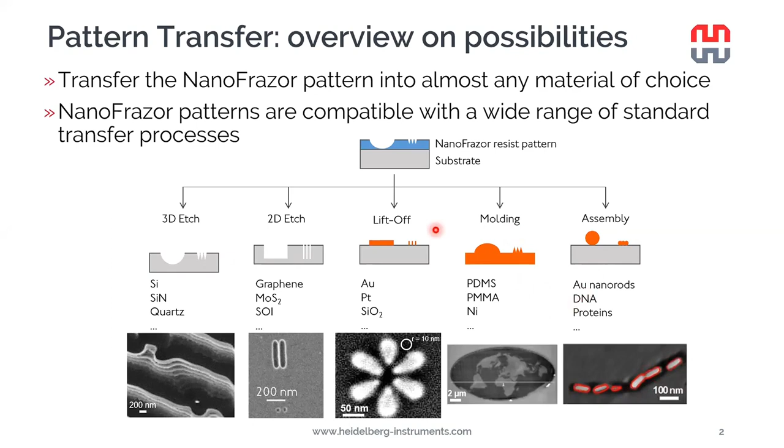Also, it is possible to mold, make replicas out of the resist structures, for example, for nano imprint mastering applications. This will also be covered in a separate webinar. Also, it's possible to assemble nanorods, nanowires, and so on by using templates patterned into the resist. But today's topic, as already mentioned, is lift-off, which is maybe the most commonly employed nanofabrication pattern transfer process.

So just looking into Wikipedia, we find the lift-off process definition. Basically you can pattern a photoresist using any lithography technology you desire. The only requirement is that there should be a hole created in the resist where the bottom is exposed to the substrate where you want your final pattern to be, and there should be some resist left elsewhere.

So that when you deposit the metal, most of the metal typically remains on top of the resist, and the parts you want to stay are deposited onto the substrate. Then when you put your sample into the solvent or chemical, the resist together with the excess metal will be removed during the process, and you will be left with only the structures that you wish to remain that were deposited in the hole in the resist.

The key here is that you have an access point or several access points for the solvent to enter the interface between the continuous metal film on top and at bottom to actually dissolve the resist.

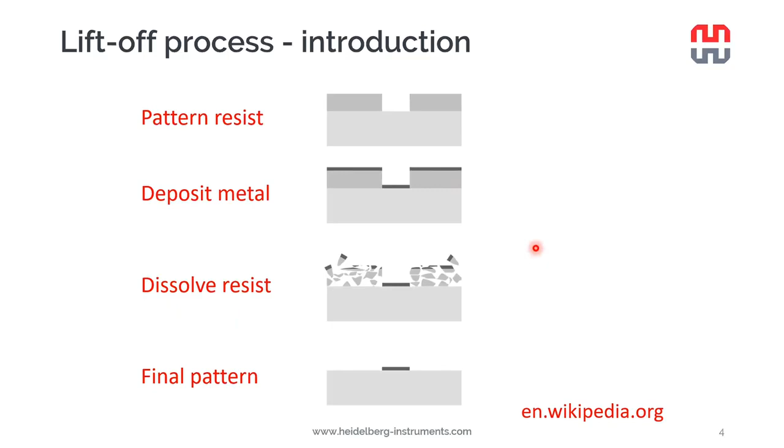Now we have a small problem with the NanoFrazor because we are using these ultra sharp heated tips for removing polymers from the samples, and we would end up, as we can see in this illustration, with sloped side walls. If we then would deposit metal everywhere on the sample, we would have a continuous film of metal, and the solvent could not remove the PPA from underneath. We would be just left with the original structure like that in the final sample.

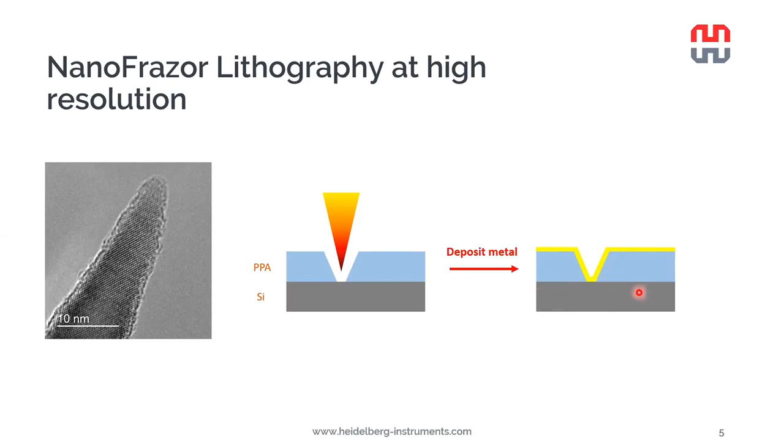Now, to overcome this problem, we introduced an additional resist layer underneath the PPA. It's called the lift-off resist, or LOR for short, on top of which then we deposit the PPA, typically around 30 nanometers in thickness. However, there are exceptions to this.

Then after patterning our desired geometry in the PPA, we carry out a wet etching step, which is typically a base, a typical developer, or a solvent that is isotropically developing the lift-off resist underneath the patterned holes. So we have a nice undercut developing in the lift-off resist, which then helps us to get this discontinuous film after the evaporation. As you can see here, the metal top at the bottom, they are not connected.

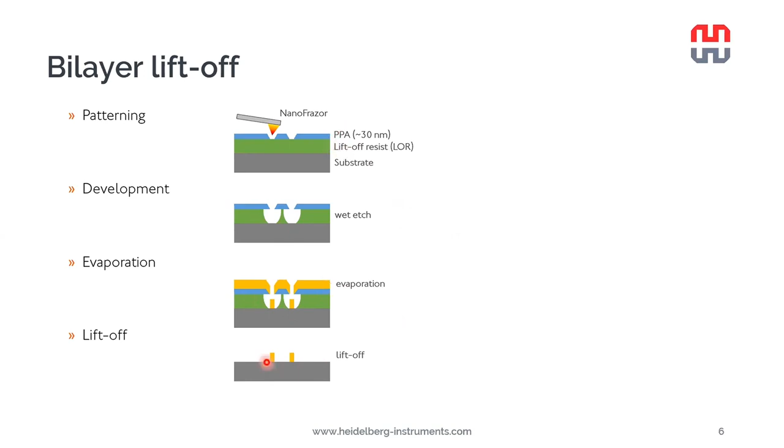And when we put the sample in a solvent, the lift-off resist, PPA, and the excess metal are removed, and we are only left with the metal where we want it to be.

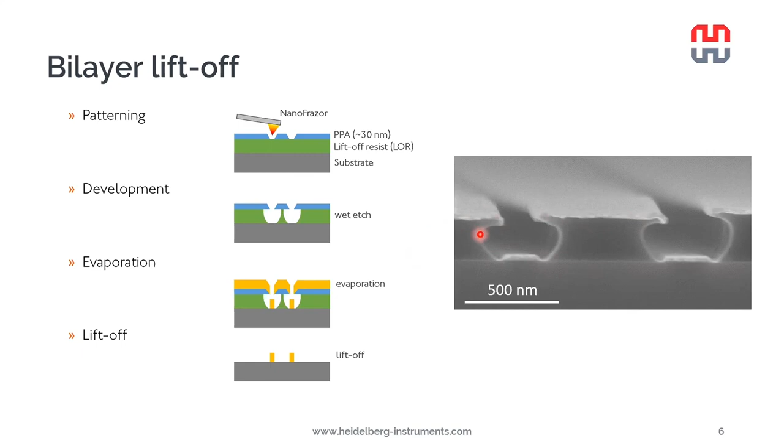In this SEM image, we see a cross-section of a bilayer lift-off sample just after the evaporation of the metal. Here we can indeed see that the metal is discontinuous between the bottom and top of the resist. We also see the freestanding PPA film and a nice undercut that has been formed in the lift-off resist.

Now, this kind of bilayer lift-off process can be applied to virtually any patterns you wish to transfer on your sample. But it's particularly useful, for example, for creating ohmic contacts to 2D materials, talking about electrodes or striped electrodes, for example.

What was done in this paper from Zheng last year was they used a layer of 200 nanometers of PMGI. PMGI is our typical lift-off resist of choice, coated with 20 nanometers of PPA, and underneath one layer of MOS2 grown by chemical vapor deposition.

After that, the sample was imaged using the NanoFrazor tip, and the flakes were still very nicely visible through the entire stack of resists. They could carry out a nice overlay of electrodes, and they removed the resist at desired locations. The PMGI was developed with diluted TMAH at a 1 nanometer per second develop rate. Low develop rate is important so that we can control the undercut accurately.

It's worth mentioning that during this process, the tip apex temperature reaches only about 120 degrees Celsius, which is enough to decompose the PPA. We estimate the temperature rise at the sample surface to be well below 10 degrees Celsius, so it's a very gentle process for sample fabrication.

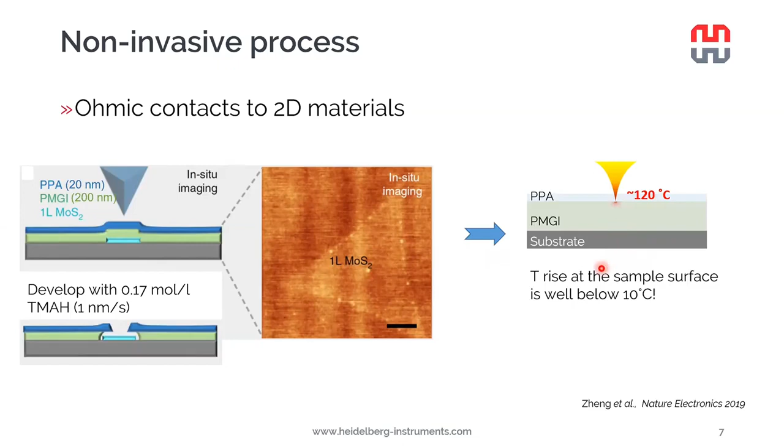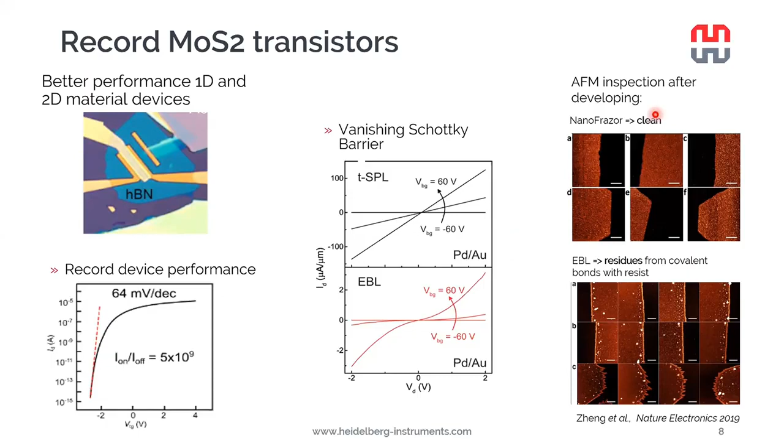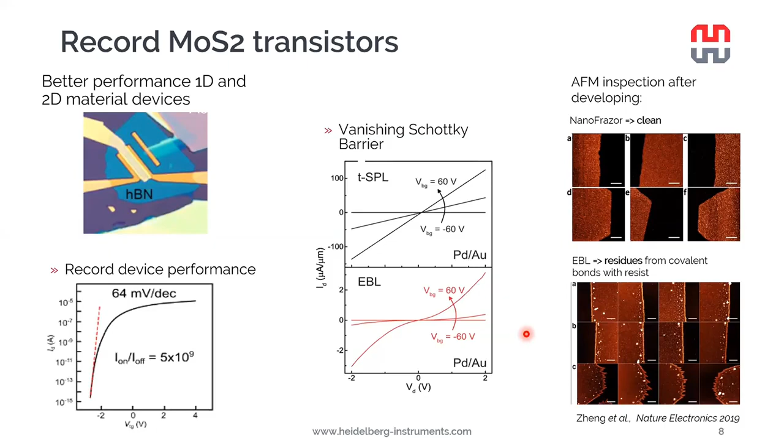One possible explanation why the devices perform so nicely could be that when we carry out AFM inspection of the MoS2 just after developing, so just before the metal deposition, the NanoFrazor samples are pristinely clean, so we don't see any modification of the material. Whereas for the electron beam lithography patterned sample, we see residues from the electron beam resist—it has, as we say, burned onto the sample. We also see roughening of edges, which is quite clear damage, which we attribute to the electron beam lithography process.

So what can be the limitations and challenges when we carry out a bilayer lift-off? First of all, when we were starting to develop this process, we quite often observed this kind of halo image around our structures. Here we want to transfer these bright squares into the metal.

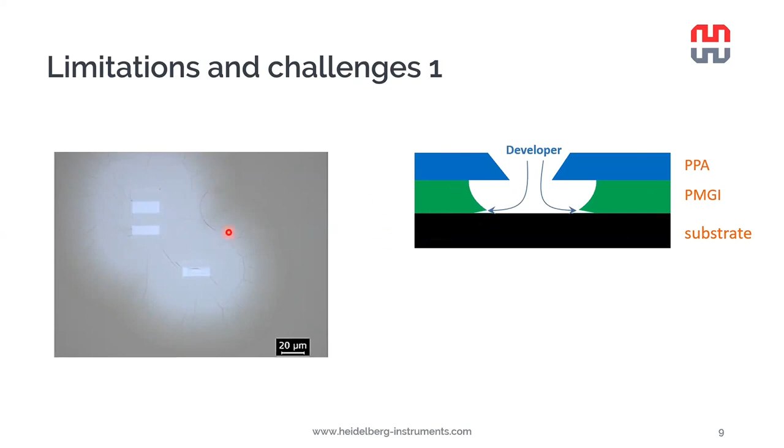What this turned out to be is that the developer is water-based, while PMGI is quite strongly hydrophobic material, and the substrate was untreated silicon, so the native oxide was hydrophilic. As a matter of fact, the developer wanted to penetrate between the PMGI and the substrate and push away to lift off the resist material. This is what we can see here.

The solution to this is quite simple: you have to just make the substrate hydrophobic to start with, by treating it with HMDS before you spin coat the PMGI layer.

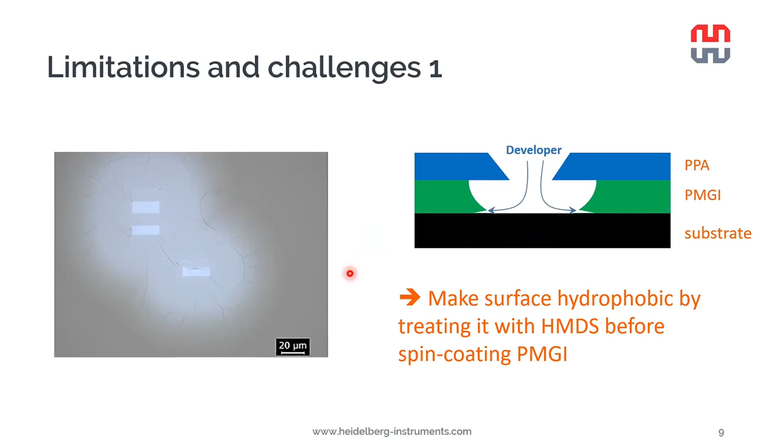The other limitation is that the maximum deposited metal thickness, we found it to be experimentally about 40% of the lift-off resist thickness. This is due to the fact that the metal tends to slowly creep from over the edges of the PPA towards the bottom.

It ends up encapsulating the entire pattern, and the solvent can no longer enter to remove the lift-off resist. So the solution, again, is simple: just use a thicker lift-off resist layer, and we can continue with thicker metal.

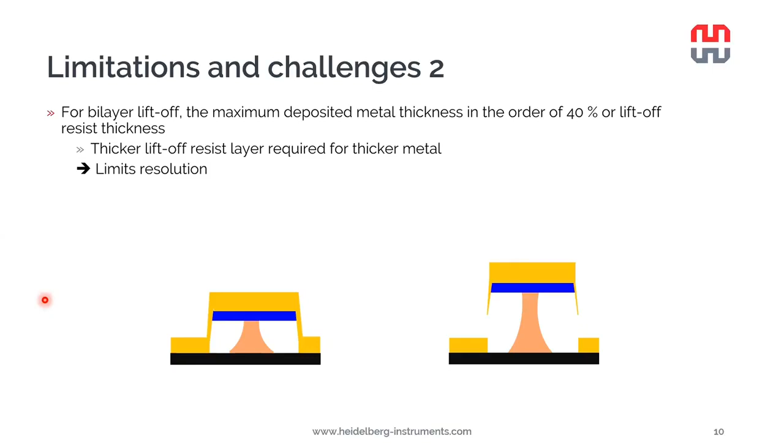But actually, as it turns out, this approach of making the LOR thicker limits the resolution as well, as I'll explain on the next slide. This is due to the fact that isotropic development is actually determining the minimum distance between the openings in the PPA, and this is approximately 2 times the thickness of the LOR layer.

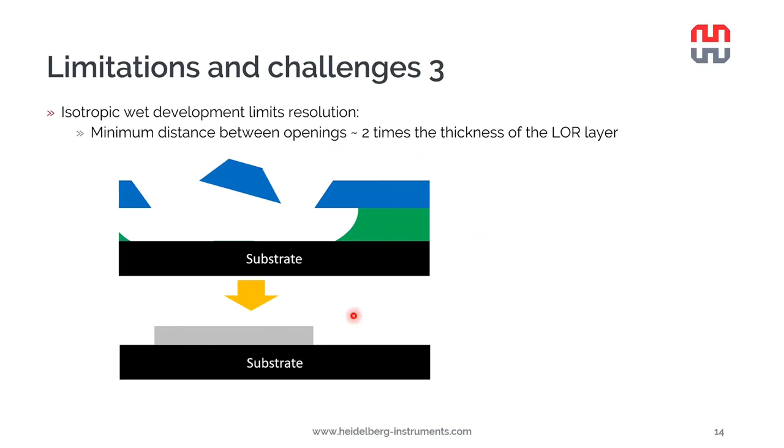It's explained best by this simple animation here. As we bring the openings in the PPA closer to each other, eventually the undercuts reach each other, and the PPA on top becomes freestanding—it will fly away in the developer. We end up having just a continuous field of metal instead of our line and space pattern.

We pushed this technique a little bit, and we managed to pattern a 70 nanometer resolution line-space array by using 35 nanometers of PMGI and 20 nanometers of PPA and a 16 nanometer metal layer thickness. It might be possible to push it a little bit more by making the PMGI thinner still, but the metal then would not be very conductive anymore. We actually have another process for high resolution lift-off, which I will explain in a moment.

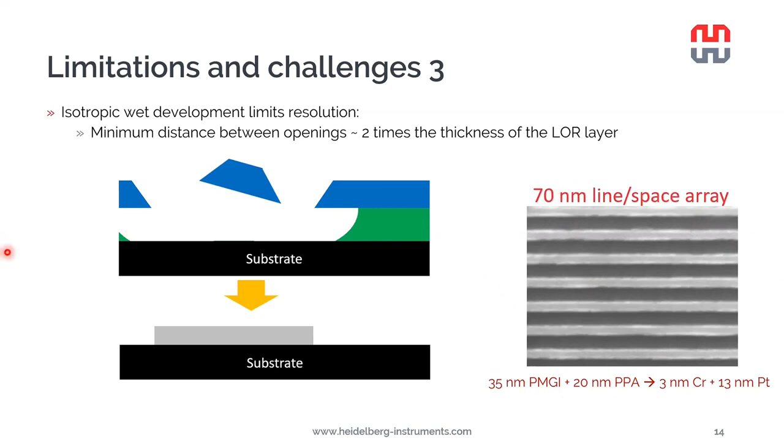But actually, such freestanding bridges can also be taken advantage of for certain device architectures. Namely, the suspended PPA bridge, if made short enough, can support its own weight, and it can be used as a shadow mask for evaporation, as explained here.

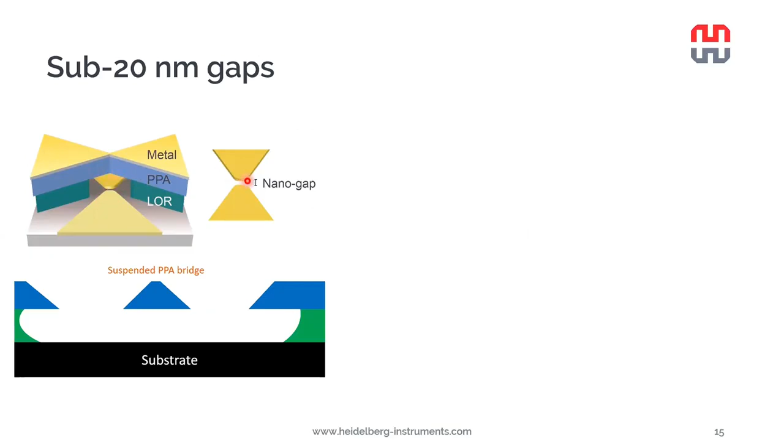So here the PPA bridge is supported by the LOR islands on both sides. The undercut has completely removed the LOR here in the middle, and what we are left with is this kind of a nano gap structure, which is defined by the PPA bridge.

Using this approach, we have achieved to pattern less than 20 nanometer nano gaps between metal electrodes. Very useful structures, for example, for plasmonics devices.

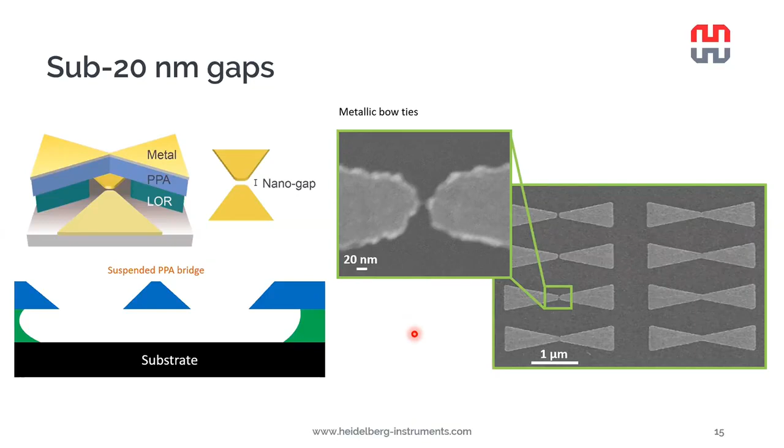Another process that takes advantage of freestanding bridges is the Dolan bridge process, which is widely employed in fabrication of different junctions for quantum computing applications. Here we again start by defining a freestanding bridge, and the trick is that we carry out evaporation with an angle, applying a tilt into the substrate during metal evaporation. This way we can evaporate metal underneath the suspended bridge.

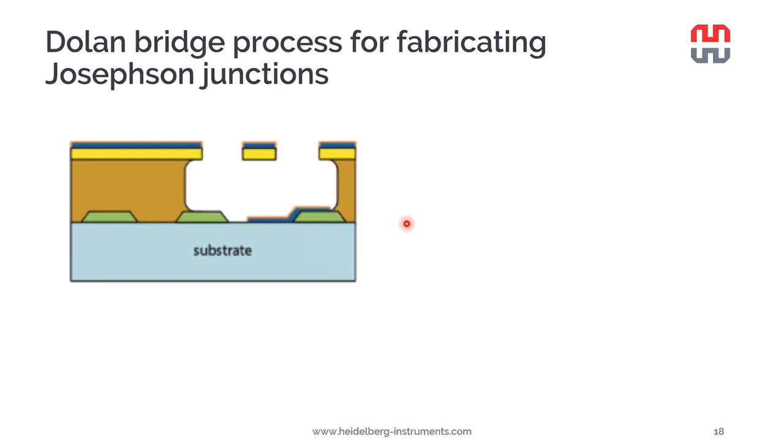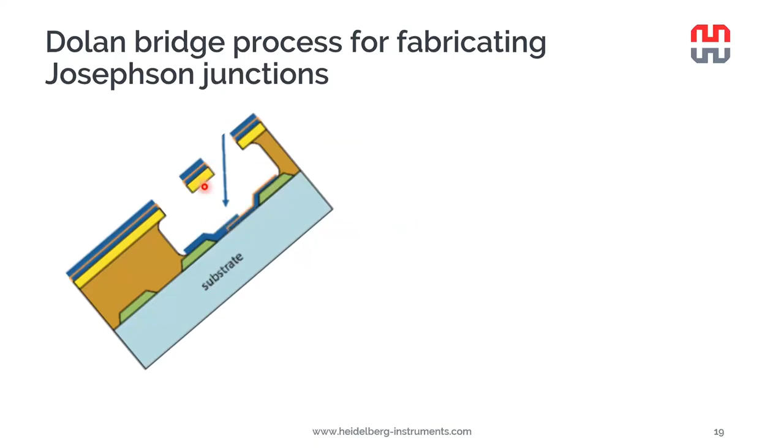If the metal we evaporated is aluminium, we just vent the evaporator, and a very thin, high quality oxide forms over the aluminium electrode. We can continue by tilting the sample to another direction, making a connection with the already evaporated metal electrode underneath the suspended bridge. The nice thing is that the overlap can be very precisely tuned by adjusting the tilting angle, so we can fabricate different kinds of Josephson junctions with different overlaps using the same geometry.

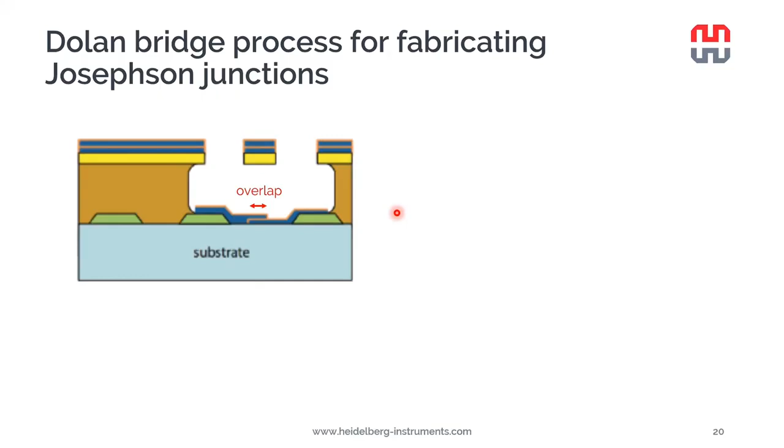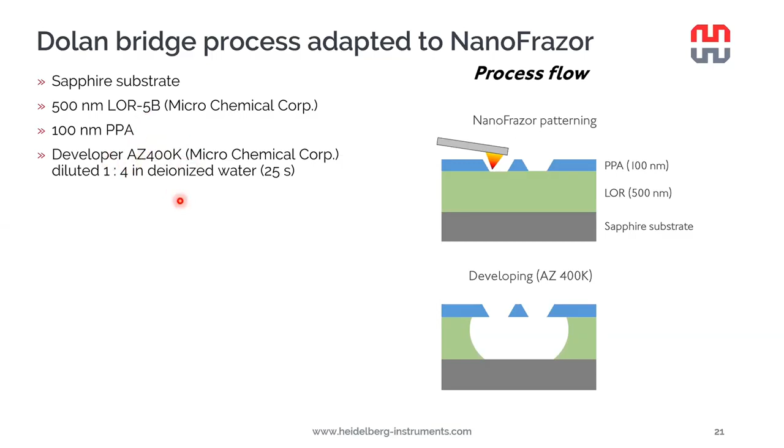We have also done this using the NanoFrazor. The structure I showed before was mainly e-beam lithography based. The main difference with NanoFrazor is just the choice of materials. We use PPA on top, a little thicker this time, 100 nanometers, to make sure our suspended bridge is mechanically stable. As a lift-off resist, we used a material called LOR5B - basically PMGI, but it develops a bit faster - all on a sapphire substrate. The LOR can also be developed using TMAH, the AZ400K developer.

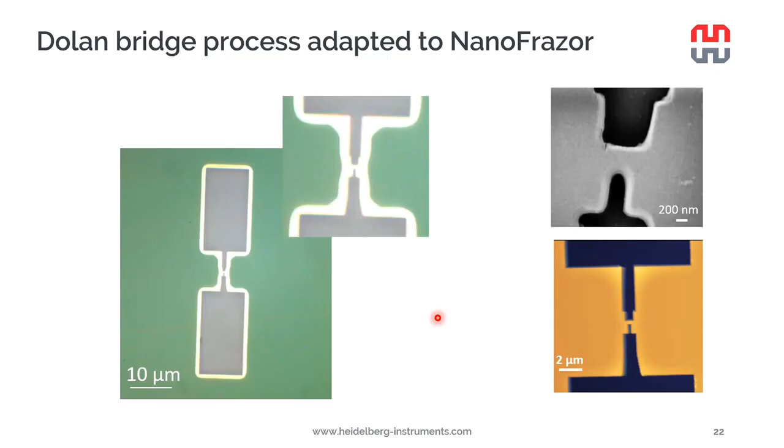In the optical image on the left, we can immediately verify just by eye that we have created a freestanding PPA bridge - the undercut is nicely visible as the bright rim around our patterns. We also verified the dimensions and condition of the bridge by SEM and AFM shown on the right. The major benefit compared to electron beam lithography is that you don't expose your sample to bombardment of electrons or other charged particles, which might get trapped and cause problems when measuring your sensitive junction.

So far I only spoke about PMGI, but there is also an alternative lift-off resist material, the PMMA copolymer. The MA stands for methacrylic acid. This material has 33% methacrylic acid, and it turns out it can also be used as a lift-off resist, giving us a nice undercut when developed.

But why did we look into this material in the first place? We had requests from customers who would like to carry out the entire device fabrication process in a completely humidity-free or water-free environment - basically a glove box, which we developed, a custom-made glove box with MBraun. We need the PMMA MA for carrying out a completely water-free lift-off process.

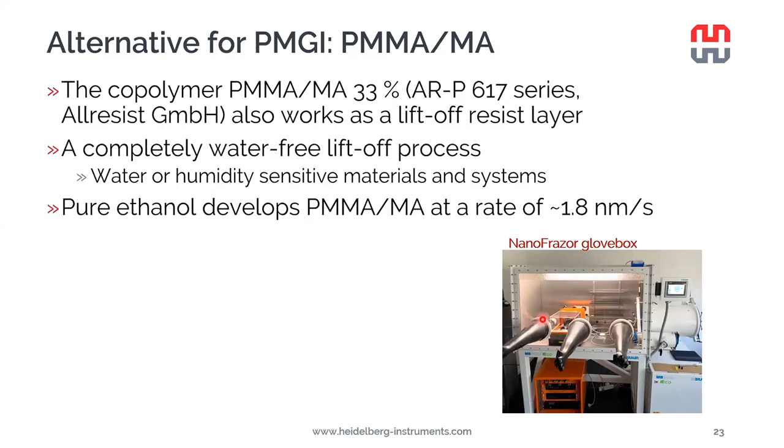It turns out it can be developed with pure ethanol at a rate of 1.8 nanometers per second. It's actually just by chance perfectly suitable for the thicknesses of materials we're dealing with here. So in the glove box environment, one can carry out the entire process - spin coating, patterning, developing, metallization and lift-off - completely water-free.

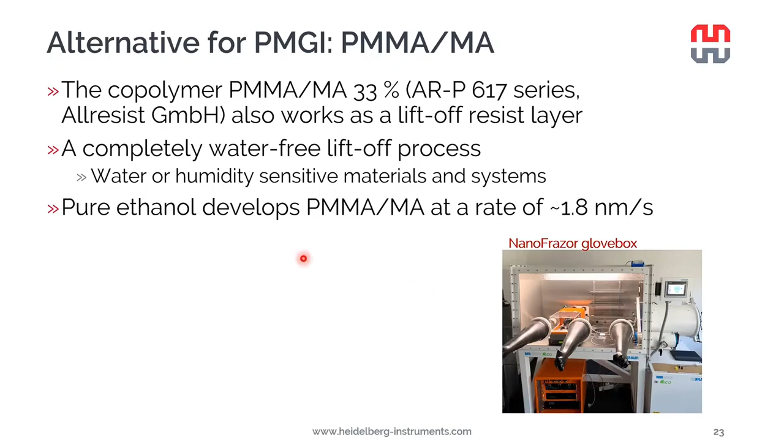Interestingly, I also managed to achieve the smallest ever nano gap between metal electrodes using ethanol developing and PMMA MA. It might be a coincidence, or it might be a property of the material, I don't know. But anyway, this is done using the freestanding PPA bridge process that I showed before.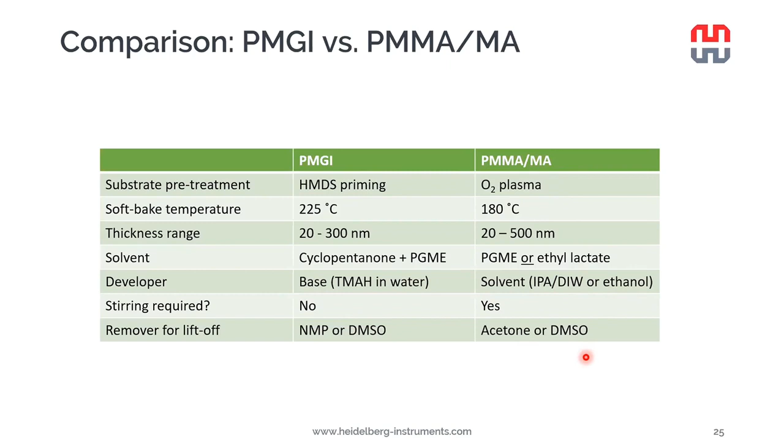I also want to mention quickly, as I referred before, we also have a process for transferring patterns that are less than 70 nanometers. We call it, very originally, the high resolution lift-off process. Here we have, instead of 2 layers, actually 3 layers. We have PMMA as the lift-off resist layer.

On top of that, we spin coat a very thin layer of silicon hard mask. We developed together with the company PiBond a material we call SH113. It's basically a spin coatable siloxane polymer that reduces into a silicon dioxide, but when exposed to a gentle oxygen plasma, it forms an extremely thin layer of silicon oxide, which is pinhole free and extremely smooth, only 1.5 nanometers thick. On top of that, we spin coat PPA, about 10 nanometers typically.

We want to make it as thin as possible so that we can pattern using the maximum resolution enabled by the sharp tips. After the patterning, we first etch the patterns from the PPA into the silicon dioxide in a reactive ion etching step. Afterwards, we transfer the pattern further into the PMMA below using oxygen plasma in a reactive ion etcher. The silicon dioxide is a very high quality oxide, so it can withstand etching of even hundreds of nanometers of PMMA if required.

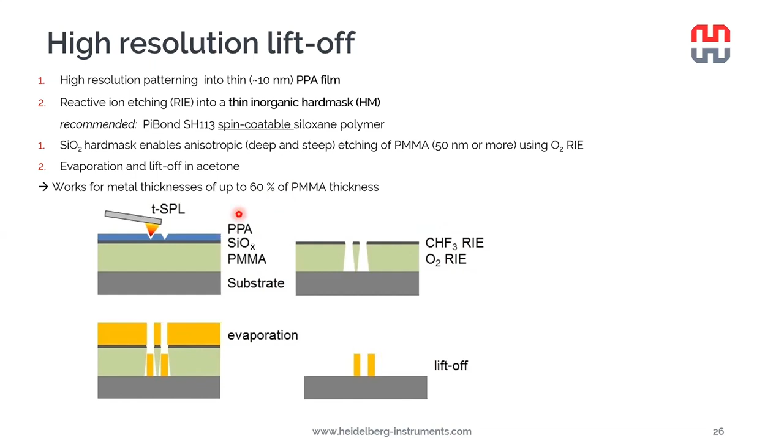In this case, the undercut that develops is much smaller than in the case of the bilayer liftoff. We can actually evaporate up to 60% of the PMMA thickness in metal, and then carry out a liftoff by dissolving the PMMA in acetone.

Here's an example structure, just a 6-fold bow tie antenna, where the tips have a radius of about 5 nanometers, and the gap between each of the leaves is less than 20 nanometers. This was a lift-off in gold.

For this process, the key features are its very high resolution, much higher than the bilayer lift-off process due to the lower undercut. The feature density we can achieve is also very much higher. However, it requires dry etching, and the etching is handled in more detail in another webinar in this series. So stay tuned for that.

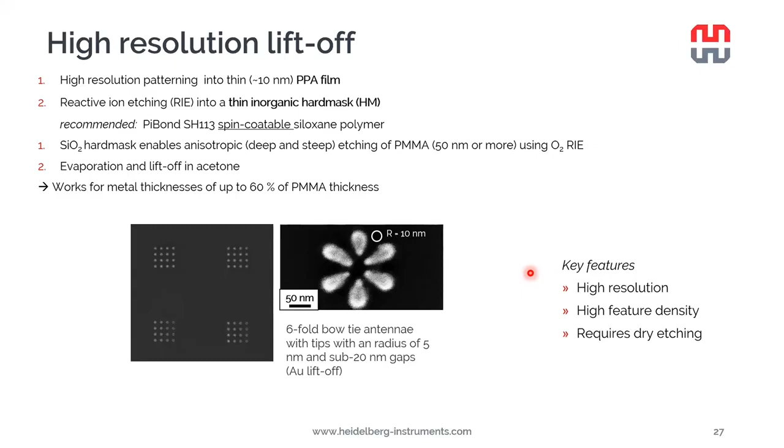The limitation of the high resolution lift-off is pattern collapse. As you can imagine, if you have a very thick PMMA film and very high resolution pattern, the aspect ratio of your structures, that is the height divided by the width, becomes higher. The tendency to pattern collapse is actually directly proportional to the square of the aspect ratio. Here we can see in these images where the aspect ratio is slowly increasing, and we can also see the amount of pattern collapse becoming more and more dominant.

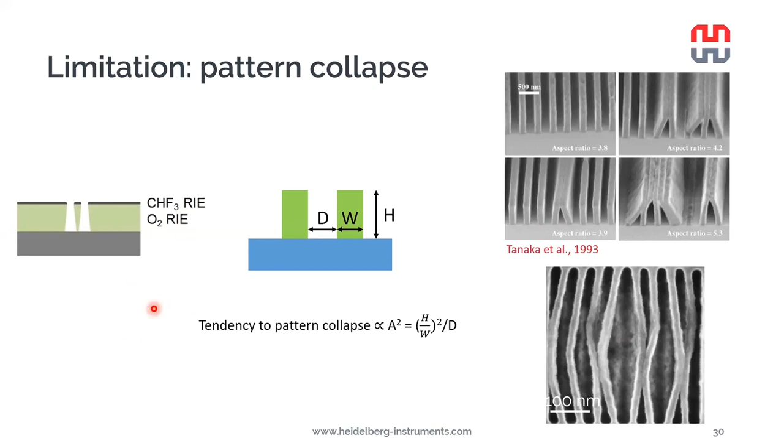In conclusion, I showed that lift-off processes are compatible with NanoFrazor patterning. We have these two processes. The bilayer lift-off is a very straightforward, quick, easy to use process. It's also very gentle, enabling contacts with minimum invasiveness to your sensitive material. As a bonus, it can also be made completely water-free in a glove box environment.

I also showed that if the resolution of the bilayer lift-off is not enough for some application, there's also the higher resolution lift-off, where we use a 3-layer pattern transfer stack that can be entirely spin coated. We can reach very high resolution, but it does require reactive ion etching, so it's a little bit more complicated.

But if you refer to the NanoFrazor process handbook, which will be an additional feature in the latest software version, coming out soon, it will contain much more detail than I have shown here about the processes and also all the materials involved.